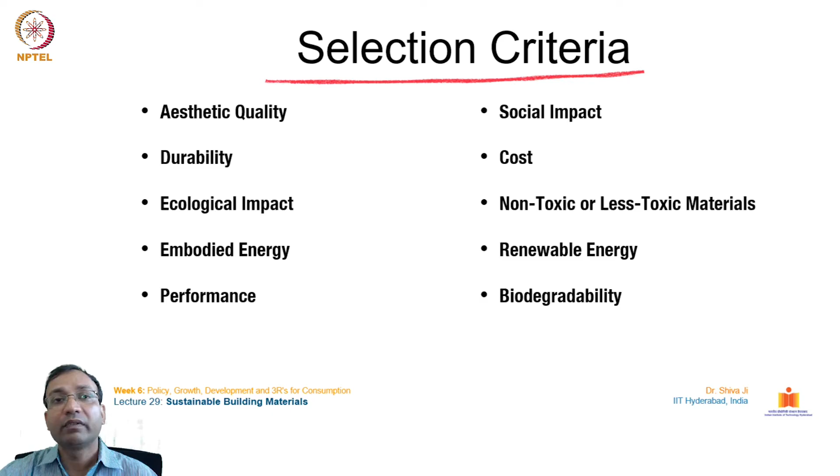Let's see what are the tentative selection criteria. Aesthetic quality is one of the important ones, but apart from that we are looking for durability, ecological impact, embodied energy, performance, social impact, cost, non-toxic or less toxic materials, renewable energy, and biodegradability. These are the criteria which have become very crucial in sustainability studies, and we will discuss more from the perspective of materials here.

The fundamental principles, or strategies, through which we can devise our guidelines and design accordingly to fulfill requirements include structural design efficiency. Why is this important? In order to reduce wastage of material, because due to lack of knowledge we may end up spending more where it is not needed, or with too little material where it is needed. A thorough and analytical study is needed to analyze the structure before construction, to optimize the efficiency of resources and materials used.

Then comes energy efficiency. Buildings consume energy throughout their life, mainly during the operation stage, when energy consumption goes very high. So we must go for energy efficiency also.

Water efficiency - water is available in finite quantity. As a natural element, this is one of the most scarce resources in today's times. We are seeing the kind of crises happening due to non-availability of water in summer months and other typical months.

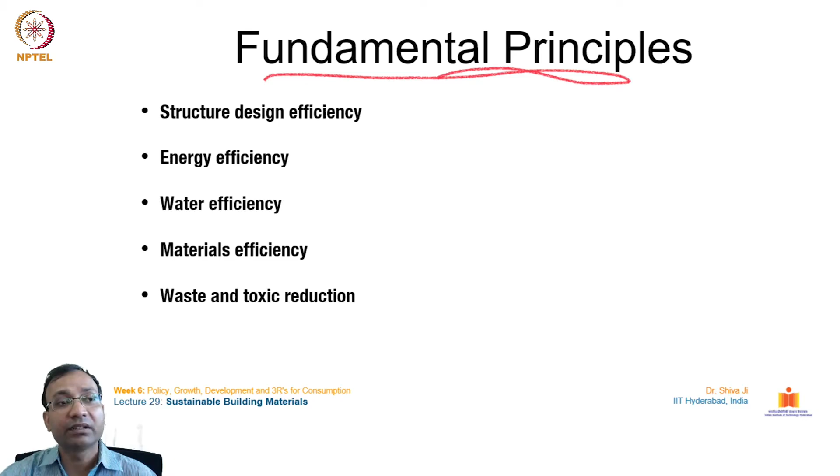Material efficiency - we can save on the bulk, on manufacturing processes, and on resources itself. There are several advantages for saving on materials. And of course, waste and toxic reduction.

Let's see how the rating method of GRIHA, Green Rating for Integrated Habitat Assessment, recommends sustainable building materials criteria in their framework. The latest GRIHA framework version 2019 has three criteria - numbers 19, 20 and 21 - which deal specifically with material sustainability factors.

The first one is utilization of alternative materials in the building. This means we should look for alternative sustainable materials in place of regular materials which are energy intensive, material intensive, or could be toxic in nature. It talks about going ahead for alternatives to those sorts of materials, and gives a good weightage of 5 points in its framework.

The second criteria is about reduction in greenhouse gas emissions parameters through life cycle assessment. It emphasizes analysis and environmental impact assessments, evaluation before going for execution of the project. This is one of the very important points we studied in the life cycle analysis and EIA lecture - we have to be very cautious about evaluating the building at the design step, before going for final execution.

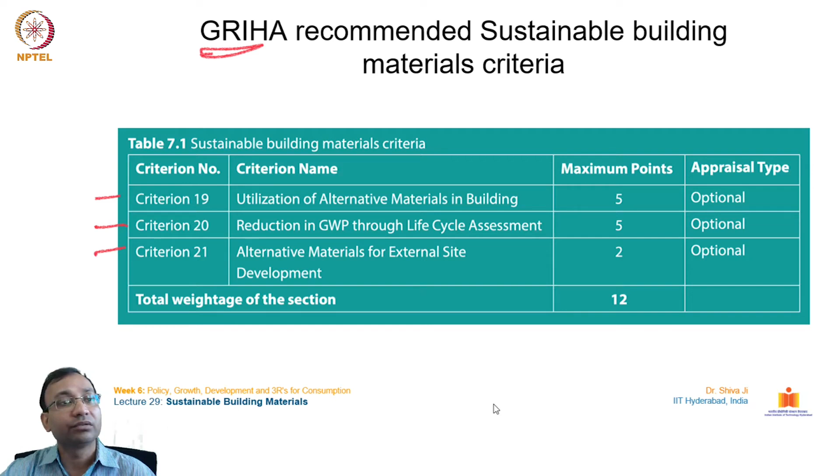So here the focus is on saving on the impacts, saving on the other conventional materials which are having some sort of impact on the ecology. So this is actually the purpose of going for sustainable building materials in construction.

So how these alternatives can be evolved. This is a list of alternative materials which can be used as a main resource material, but they are actually a byproduct, they are waste of some other product. We are all familiar with fly ash, red mud, slag, unfired clay bricks, manufactured sand, glass, and several other materials which are being adopted in recent times in the construction industry as alternative materials.

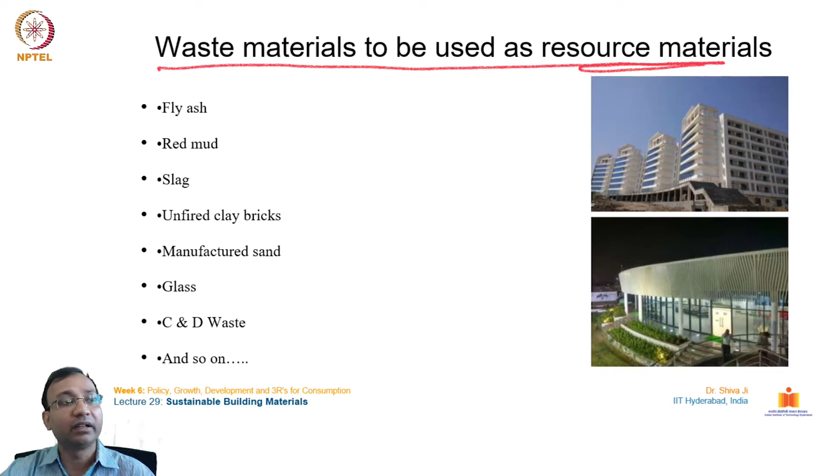Here this slide talks about using mainly materials which are still available in their natural form, natural condition, and which are not so highly or complexly processed. So they can be taken care of while dismantling, disintegrating, and disposing them at the end of their life cycle. So those could be like paper, artificial stones, carbon fibers, translucent concrete.

Rubber modified asphalt, plastic, recycled bitumen, silica fumes. There are several other types of material, even husk of several crops, cloth rayons, and fibers available from discarded garments.

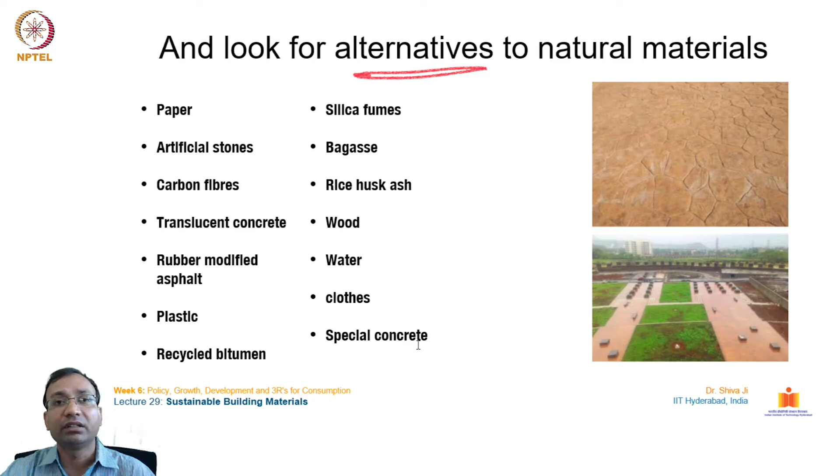So these could find several applications in the whole construction material category. Well, how can these be used? So this is one very interesting example from India itself.

We can see this road was constructed. The top layer of this road was actually constructed using waste plastic, and you can see the hoarding over here which talks about the plastic waste road. So there are several advantages. This plastic is going to land up in a landfill. So how can this be put to use somewhere?

So we spoke about what is pollution. Pollution is material in the wrong place. When a material reaches the wrong place, it becomes a polluting thing for that place obviously. So why can't this material, which is pollution for the rest of the environment, be put to some use?

It uses a higher percentage of plastic waste. It reduces the need for bitumen by around 10%, increases the strength and performance of the road, reduces the cost to around 5,000 per kilometer for a single lane road, generates jobs for rag pickers, develops eco-friendly technology, improves fatigue life of the road, and gives better resistance towards rainwater and cold weather.

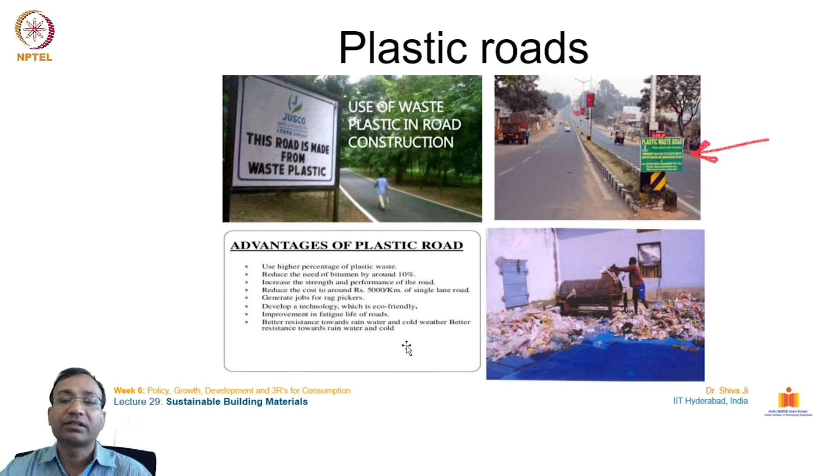So these are some advantages we can have over using conventional bitumen-based or tar-based road surfaces. So why not have such experiments, and we can evolve methods and ways to have such constructions in other places also.

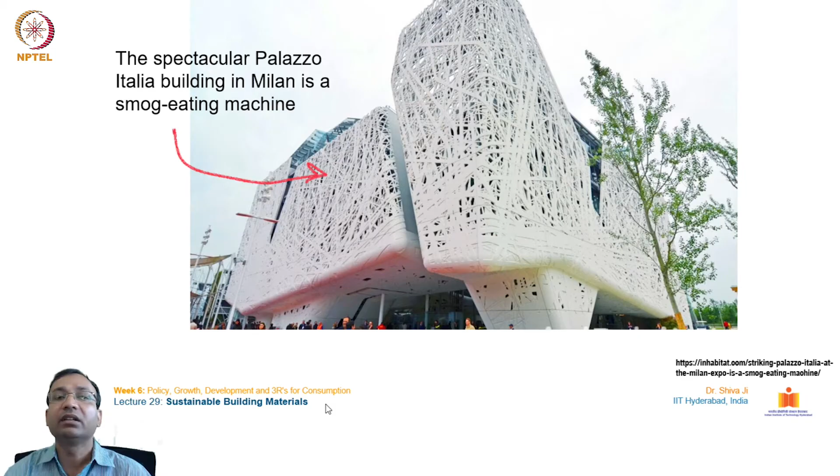This is one example you can see over here. This is a building in Milan which actually sucks the pollution content from the air, from the atmosphere, and this is known as a smog eating machine, a smog eating building. So we will look at the details of this building.

If you see, the cladding of the white sinuous building is both highly innovative and sustainable. The 9,000 square meter facade was realized with 900 biodynamic concrete panels developed by Italcementi. Its TX Active technology captures air pollution when the envelope material comes into contact with light, which it then transforms into inert salts, reducing smog levels in the environment.

Each exterior panel of Palazzo Italia, produced with the StyleComp technology, is unique, and the building itself is a net zero energy building, which means, thanks to the design team's extensive use of photovoltaic glass and photocatalytic concrete cladding, the structure is capable of covering its energy needs autonomously.

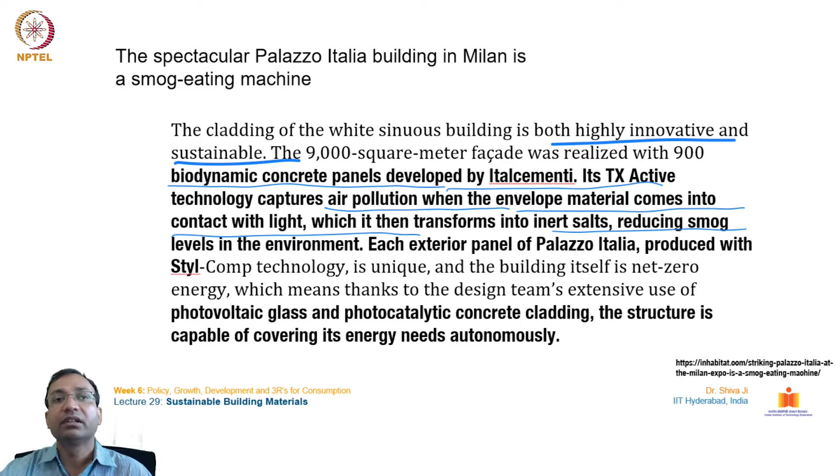So you can see how interestingly, how innovatively the technology is used over here. First, to go for the net zero energy building concept, and second, to reduce the pollution from the air of the atmosphere. So this is one of the beautiful examples I came across to share with you guys, how we can put to use several interesting innovative materials, innovative techniques, innovative processes to improve the overall sustainability factor.

If you see over here, the major three resources required for any building construction are materials, energy, and water. So these are the three major resources we need, and our sustainable building design approach has to consider these three resources in terms of their depletion and the environmental and social impacts associated with their use.

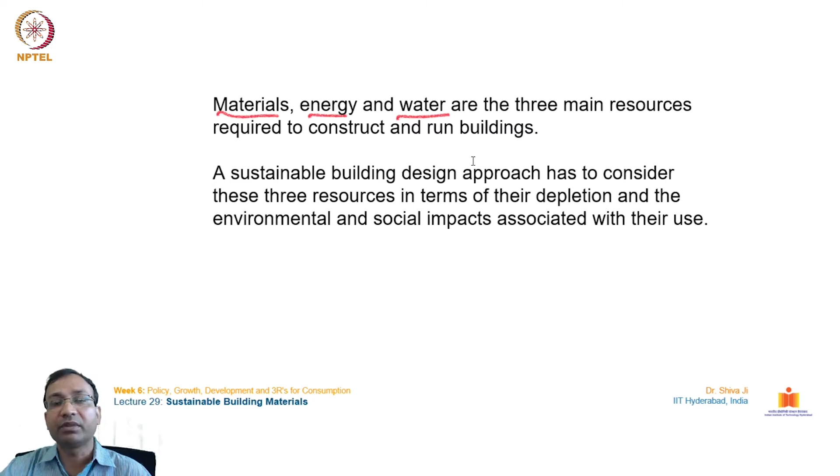So we have to take care of these because all three are very crucial. If you look at the volume, they're related to the built environment, which consumes the largest energy among all sectors across the world. This is one of the highly potent areas where any intervention is welcome to save these three important resources of materials, energy, and water.

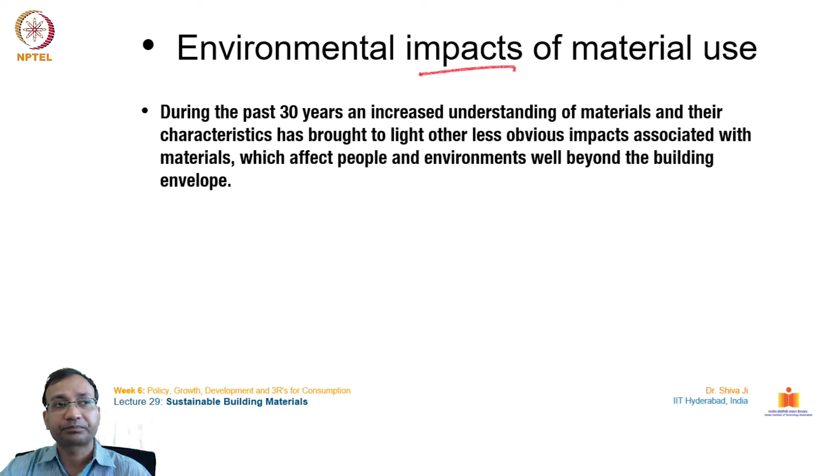So what are the environmental impacts of material use? During the past 30 years, an increased understanding of materials and their characteristics has brought to light other less obvious impacts associated with materials, which affect people and environments well beyond the building envelope. The potential remoteness of these impacts makes the link between cause and effect harder to see.

When we talk about how such big impacts are coming in recent times, there is a cause and effect method in place which is working to create imbalances, through human intervention and human misadventures in the ecology - destroying forests, destroying the pure state of water streams, rivers, lakes, and polluting the air. These all occur into other catastrophic events such as acid rains, increased temperature, wildfires, and several other repercussions you are already aware of.

For example, the use of tropical rainforest timber paneling in Europe may result in some catastrophic event happening somewhere else, in some other country. You may be aware of this butterfly effect - it emphasizes the uncertain probability of catastrophic events which may occur even from the slightest change in the ecological balance. This puts important emphasis on controlling the causes so that the bad effects can be reduced and taken care of.

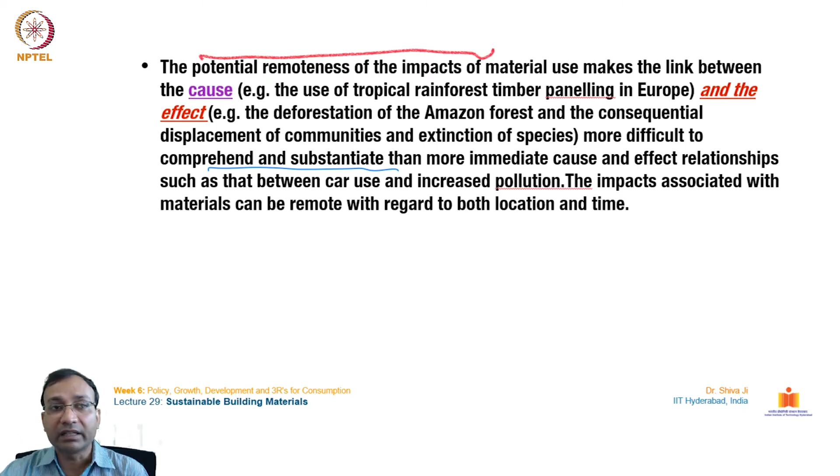The impacts associated with materials can be remote with regard to both location and time, and they can happen anywhere. For example, if there is a lot of mining of some metal or material at one place, it may result in imbalance in water levels, imbalance in the biodiversity of that area, and may result in some other unnatural activity somewhere else. So that uncertainty is always there.

There are examples where timber might be used thousands of kilometers from where the deforestation occurs, and the detrimental effect of asbestos on health only becomes apparent decades after the contamination takes place. We are all aware of asbestos and other types of materials which have conventionally been part of the construction sector. They are found to be carcinogens, and their impact is felt only after a longer period of time, becoming irreversible and quite damaging. So each and every material needs to be studied properly and understood to have lesser impacts before being approved for use in the design and construction sector.

The resourcing of materials, their manufacturing processes, transport requirements, use and final disposal can involve wide-reaching environmental and social damage, including global warming - which is very obvious and universal - pollution, depletion of natural resources, destruction of natural habitats, extinction of plant and animal species, waste production, destruction of communities, and health problems. In recent years, these impacts have come to the places around us, whichever state or country we belong to - touching each one's life in some way or the other.

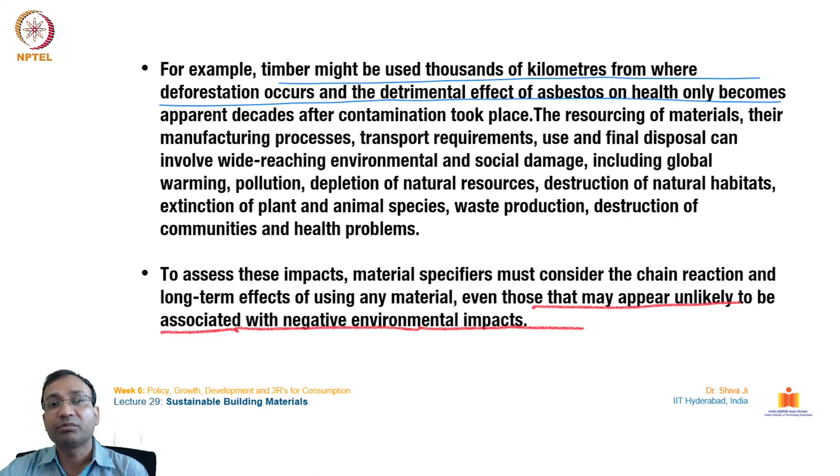To assess these impacts, material specifiers must consider the chain reaction and long-term effects of using any material, even those that may appear unlikely to be associated with negative environmental impact. So it is very important to understand the life cycle analysis of any such material which we are using in our industry.

Regarding material resourcing, building products are usually derived from natural materials that are harvested or extracted and then processed. The moment manufacturing gets involved, like factory-based manufacturing, these resources come to possess different properties, which may affect our health and the health of the ecosystem in multiple ways.

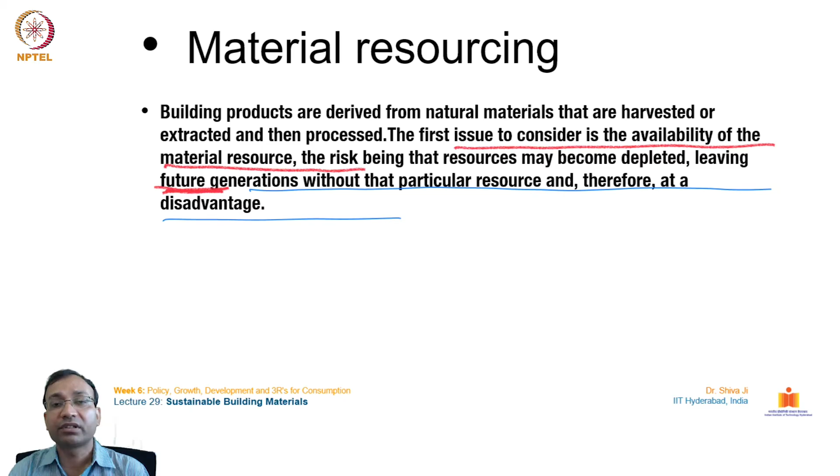The first issue to consider is the availability of the material resource. The risk being that resources may become depleted, leaving future generations without that particular resource, and therefore at a disadvantage. Several such resources are so fast harvested, extracted from nature, that it is speculated some resources may actually go completely exhausted from the face of the planet.

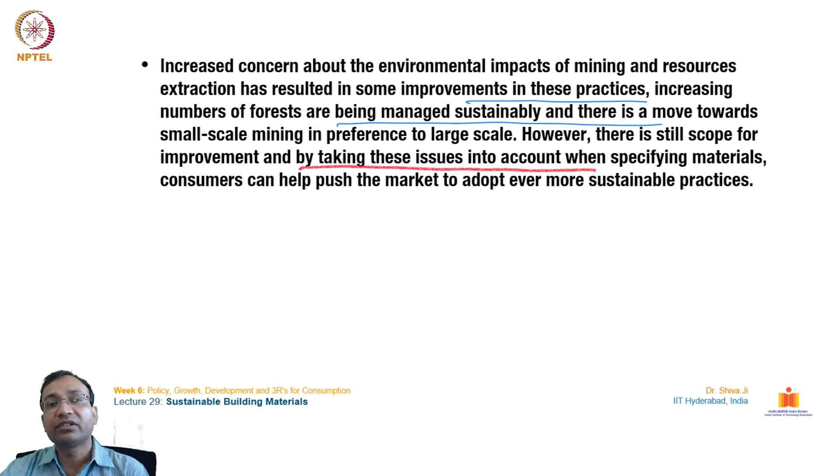Increased concern about the environmental impacts of mining and resource extraction has resulted in some improvements in these practices. An increasing number of forests are being managed sustainably, and there is a move towards small scale mining in preference to large scale. However, there is still scope for improvement, and by taking these issues into account when specifying materials, consumers can help push the market to adopt ever more sustainable practices. This awareness is very important to spread between manufacturers, miners, consumers, every stakeholder. So what sorts of manufacturing processes can we go for?

Materials are rarely used in their completely natural state. This is where all this new age manufacturing, fabrication, and industrialized way of treating materials has come into the picture. Some preparation or manufacturing is generally necessary to create a usable building product.

The impact associated with manufacturing can include pollution to air, water, and ground, and so on. Manufacturing also generally requires energy, which is mainly derived from fossil fuels and is associated with global warming and pollution. So we can see that at any stage of a product's life cycle, there are impacts of some way or the other.

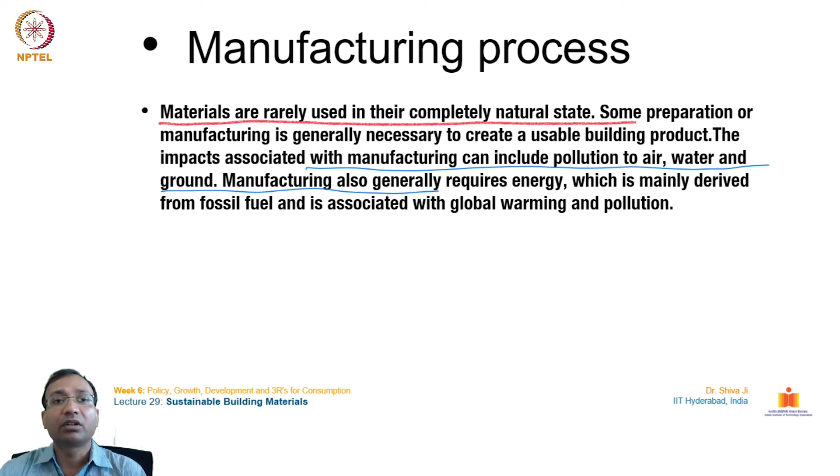Usually in today's time, the point highlighted is that we are not using materials in their almost natural or near-to-natural state. We are actually processing them, turning them into some other type of final product, and then using it. This process itself has become quite detrimental to the ecological balance.

At one end of the environmental impact scale, there are natural materials. These are materials found in nature, such as timber and stone, that require minimal processing before use. A material with such minimal manufacturing impact is the adobe brick, made with earth and water and dried in the sun. A process that makes use of plentiful naturally occurring material, uses manual labor and the sun's heat rather than burning fossil fuels, and consequently produces almost no pollution or waste.

We have seen adobe houses, which are the best example of utilizing natural resources without actually processing them. Whatever processes are adopted are also very natural. The adobe material is taken, purified, laid into molds, sun dried, put together with mud itself, and dried in the sun only. So it doesn't use any external or artificial energy, and doesn't utilize any industrial processing. This is one of the best examples of going with the purity of material which is abundantly available in nature.

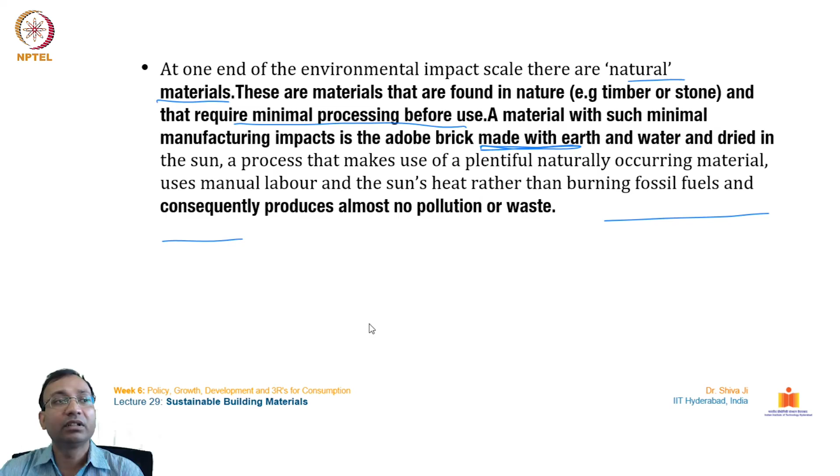For sustainable material selection, there could be some criteria and strategies, like minimizing the need of the material itself first, so that we can get rid of the processing and other consequences which may arise later on. So, building only when it is really necessary. Building small, not very big, because with bigger volume and size of building, a huge amount of material will also be utilized. Design for effective use of materials, design for durability and for reduced maintenance.

Secondly, we can go for grouping like using existing materials, so that we can increase the longevity, we can reduce the production of new material if the old material is good enough to be used in place of new materials. So we can go for reusing existing materials, reusing existing building components, and using recycled materials. These are some approaches, some strategies through which we can take up our design exercises.

There are some other strategies also through which we can design our buildings, such as designing to enable future building and materials reuse and recycling. So the designing itself should happen in such a way that at the end of the life cycle stage, the building and its components can go for reusing and recyclability easily. They should not pose complexity in dismantling or taking the components out.

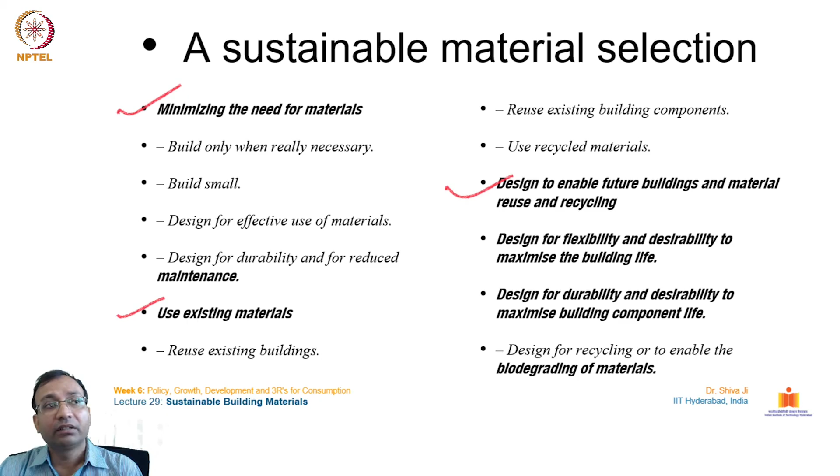There could be some thought processes given for material selection by specifying renewable material with short generation and regeneration cycles, specifying timber from managed and accredited sources only, for example FSC accreditation, managed forest systems and all. The countries of Canada and New Zealand have this kind of mechanism in place right now, so we can learn from these places and evolve similar practices in our own country as well.

We can specify plentiful resources and avoid scarce resources, specifying materials mined, harvested or extracted with minimal impact on the local and global environment. We can go for specifying material associated with low manufacturing pollution, specifying materials associated with low levels of CO2 emissions over the life of the building, considering their impact on saving running energy.

Consider manufacturers' environmental policies, track records and reporting. Specify materials that do not pollute the indoor air. Select locally produced materials requiring minimal transport.

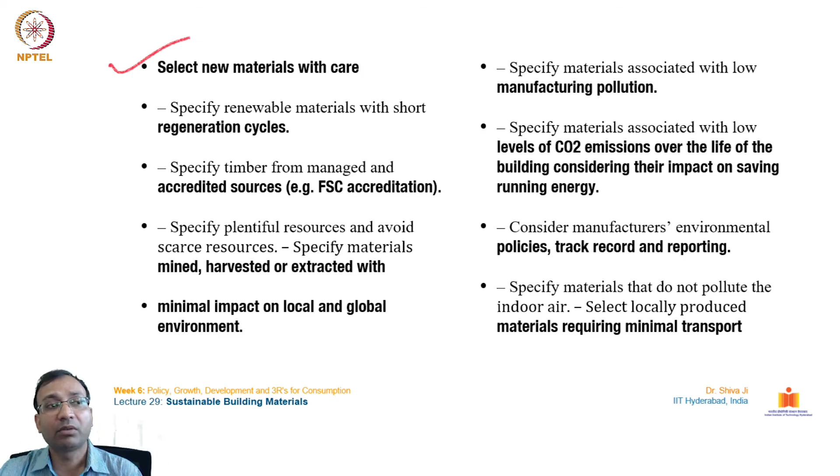So that we were talking about the other day about indirect emissions. For that, the transportation sector is one of the major contributions for indirect emissions, and a material should not be taken very far away from the place of its manufacturing or fabrication in order to avoid the indirect emissions. So this is what this particular slide is talking about.

Material disposal and waste minimization. If we see this thought, segregating the components of the building and converting them into inert materials, so that they can go with any other component or material also. So segregating timber, inert metal and soil waste during construction and demolition, and ensure their recycling.

Arranging for excess materials ordered, and where possible waste materials to be taken back by the material suppliers, including recycling provisions in the building. So this second point talks about creating a mechanism where the surplus material, the waste, can be taken by the supplier from the manufacturing agency, so that they can take it as a raw material.

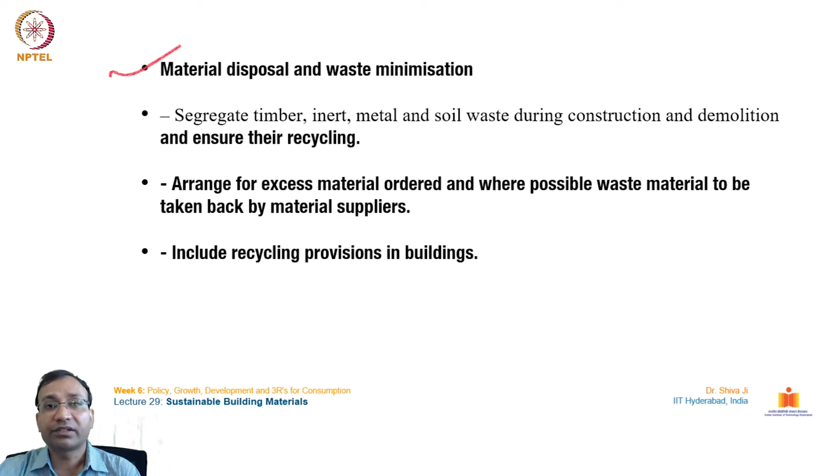And they can again convert them into a usable product. So we saw yesterday, in one of the previous lectures, that carpet manufacturing company was utilizing 100% of its material for reuse and recycling, and they are working for creating almost nil waste from their manufacturing facility. So this kind of effort is laudable, and these are the critical strategies required in today's context.

So material, energy and transport, on this thing, if you see, there are some concerns on these factors also.

Unlike the example of adobe construction given earlier, most building materials require energy for extraction and manufacturing. Energy is also required for transporting material to the site, maintaining it, and finally disposing of it. The total energy used is known as the embodied energy.

Embodied energy is the energy required for sourcing, manufacturing, transporting and finishing a product. If you combine the energy required at all of these stages, that combined energy is called the embodied energy. So by reducing energy expenses at each of these stages, we can overall reduce the embodied energy of any product.

So the total energy used is known as embodied energy. Energy is still mainly produced by burning fossil fuels and is therefore associated with global warming and pollution. Specifying low embodied energy materials is therefore generally desirable.

Unfortunately, estimates for the embodied energy of materials can vary depending upon the method used to calculate it, and can be misleading. Embodied energy calculations do not generally differentiate between energy produced from fossil fuels and that produced by alternative means not associated with CO2 emissions. They sometimes include the energy for transport of material to site, for maintenance and disposal, and sometimes they do not.

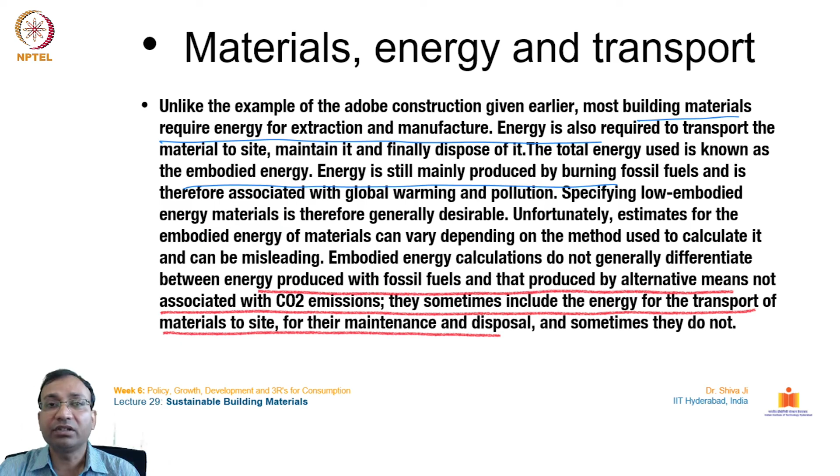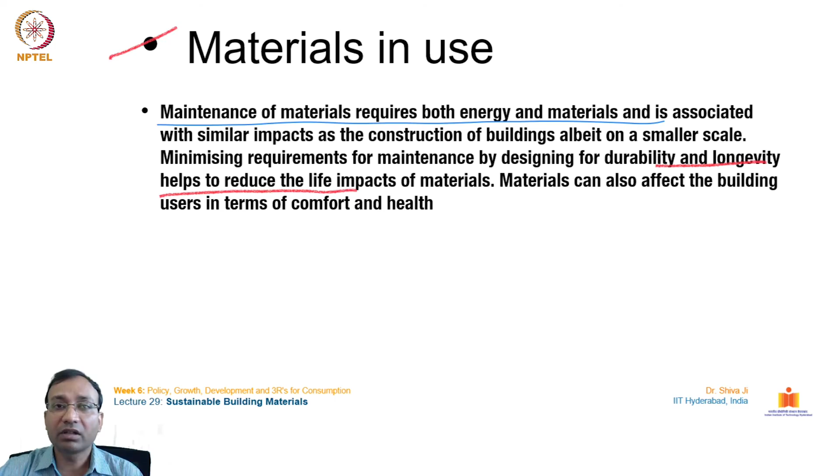About materials in use: maintenance of materials requires both energy and materials, and is associated with similar impacts as the construction of buildings, albeit on a smaller scale. Minimizing requirements for maintenance by designing for durability and longevity helps reduce the life impacts of the material. Materials can also affect building users in terms of comfort and health.

Materials disposal: the building industry in the UK is currently responsible for 70 million tons of construction and demolition waste every year, most of which is sent to landfills. There are numerous problems associated with landfill sites, including use of land, toxic materials leaching into groundwater, emissions of explosive gases, sometimes explosions, and structural instability.

Appropriate site waste segregation, designing to enable reuse and recycling, and using reclaimed and recycled materials all contribute to diverting waste from landfill and other polluting waste disposal options. Building design can also encourage recycling of domestic or commercial waste by providing appropriate recycling facilities in the building itself.

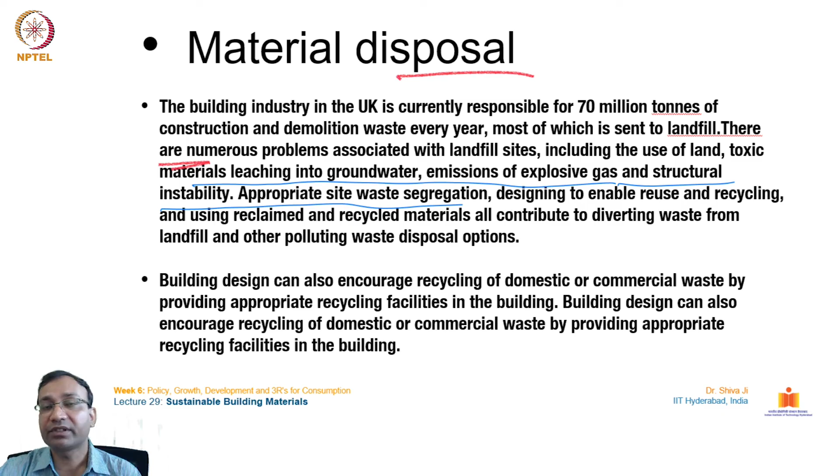Another strategy here is designing for longevity. Longevity means expanding the lifespan of any product. So if we expand the lifespan of a product, for example twice, that directly means we are saving at least the production of another unit of that same material by extending the lifespan of the first material in its place. By using the material for twice its lifespan, we can at least save one unit of that material. It's as simple as that.

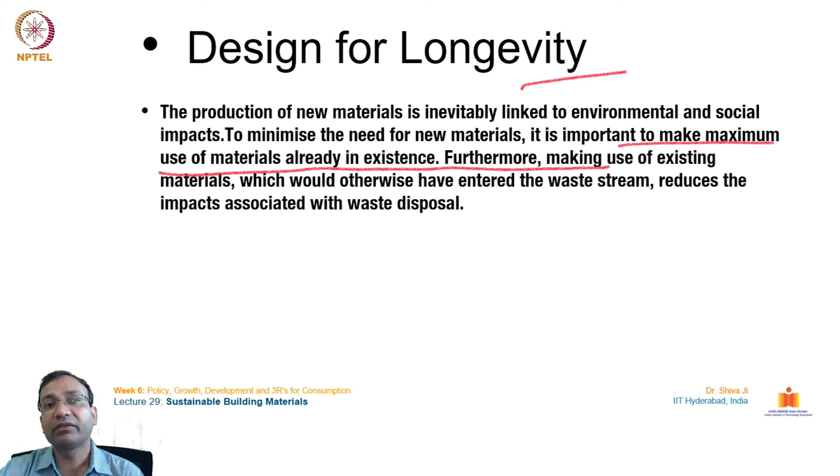The production of new materials is inevitably linked to environmental and social impacts. To minimize the need for new materials, it is important to make maximum use of material already in existence. Furthermore, making use of existing materials which would otherwise have entered the waste stream reduces the impacts associated with waste disposal. So there are only benefits, there is no harm in using this strategy of designing for longevity.

Some guidance for designing to enable dismantling: this is also a very important stage, where once the product life cycle is over, it goes for some sort of dismantling, degradation, decomposition, or disposal. At that time, the material or component should be able to be disassembled properly, so that the different materials can be disposed of in a responsible way.

So some things which are necessary to be aware of at the beginning: providing as-built drawings and a maintenance log, including identification of points of disassembly, components and materials. Also identify materials and points of disassembly on elements, so that it's clear how the components of that product are going to be disassembled. This information should be given beforehand to the dismantling agency.

Provide easy and safe access to the building elements and fixings with minimal machinery requirements, so they can be carried out without much hindrance. For the dismantling process: simplify fixing systems, enabling removal by means of small hand tools and handheld electrical tools, avoiding specialist plant, using mechanical rather than chemical fixing, providing realistic tolerances for assembly and disassembly, and designing joints and components to withstand the dismantling process.

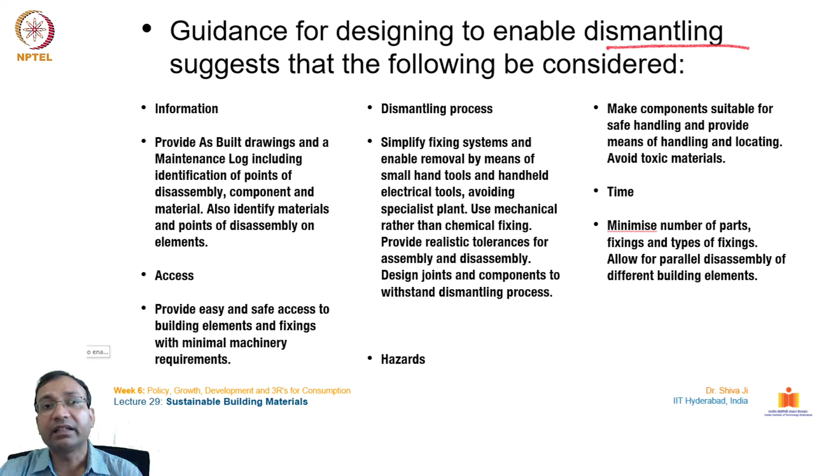Finally, guidance for designing to enable the reuse of building elements, and alternatively their recycling if reuse is not possible, recommends the following points.

For reprocessing: use materials that require minimal reworking. Avoid non-recyclable materials such as composite materials, as they are very difficult to recycle. Also avoid treatments and secondary finishes that complicate reprocessing, such as powder coating or lamination. These are appealing and aesthetically pleasing treatments and finishes for several types of products, but they end up complicating that product for disassembly and recycling.

Minimize the number of component types. Ensure that inseparable sub-assemblies are made from the same material, and that components of different materials are easy to separate.

For hazards: minimize toxic content. If toxic content is unavoidable, ensure the ability to release it in a controlled manner. Make components sized and of a weight to suit the means of handling, and provide means of handling and locating it.

About durability: use sturdy materials and avoid fragile ones. Design joints and components to withstand repeated use, so that there is less wear and tear, and one can save on the maintenance and operations part of the product's life stage.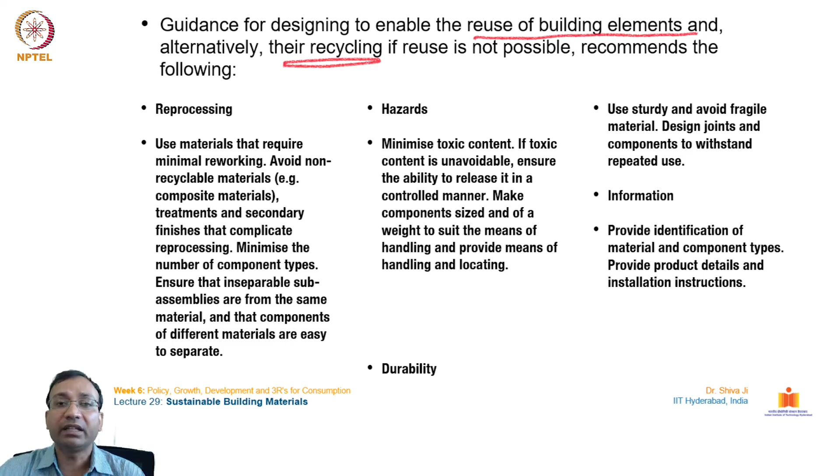About information: provide identification of material and component types, along with product details and installation instructions. This information has to be complete from end to end, to enable successful and unhindered operation, as well as successful and complete recycling and disposal of any building material. That is the intent of this lecture.

So we can talk about some final approaches to dispose of these materials, by reusing them, by recycling them, or even by downcycling them.

Reuse means putting to new use a previously used building component taken from a building or other source. The building component can be made of a single material, such as brick, slate tile, timber joist, precast concrete floor, etc., or more than one material, such as a door with ironmongery, composite wall panels, or precast concrete foundations. It can require no processing, such as a roof tile, or significant processing, such as paint stripping and refinishing doors.

Second, recycling: reprocessing a material or component to form the same or an equivalent material or component, such as metal roofing recycled to make new metal roofing or wall cladding. So materials can go for recycling or reusing. And lastly, downcycling: reprocessing a material into a lower grade material, such as concrete or brick into hardcore, or timber into chipboard. These materials become inferior through downcycling, but can still be used for other sorts of usages and applications.

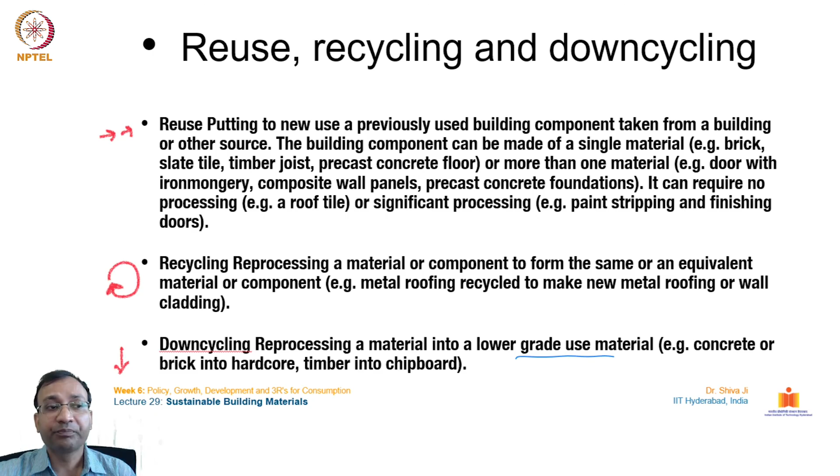These are the strategies which are very important as far as sustainable building construction materials are concerned, and that is why we have discussed them here. With this, I would like to come to an end of this lecture. Thank you all.